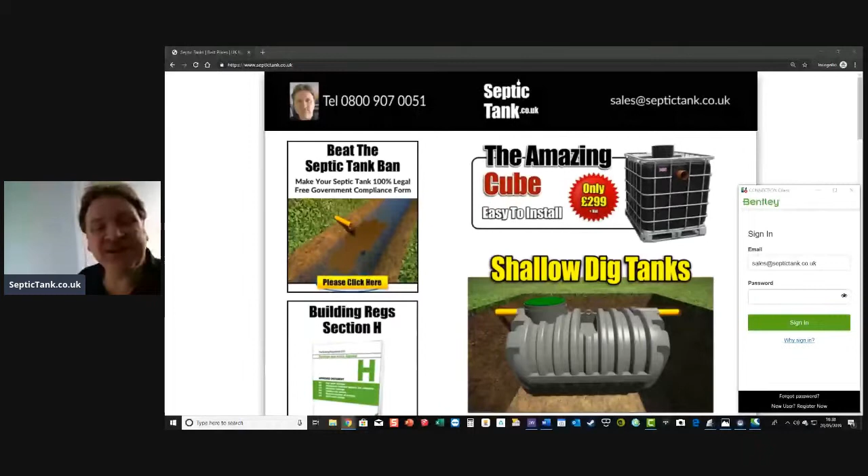Today I'm going to be discussing a very controversial subject called the septic tank ban. So, what is this septic tank ban? Well, let me show you.

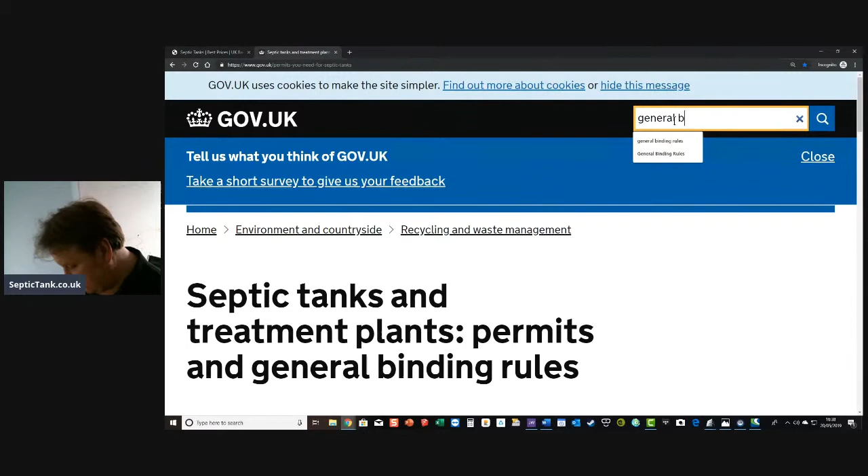If I go onto gov.uk, and you can do this yourself, the government's website for the whole of the UK, just type into the search bar 'general binding rules.' You'll get quite a few different headlines and subcategories. Click on the third one down because it gets straight to the point. Here we go: general binding rules. That's another term for the septic tank ban.

It says: rules you must follow if your septic tank or your small sewage discharge treatment plant releases or discharges liquid to surface water.

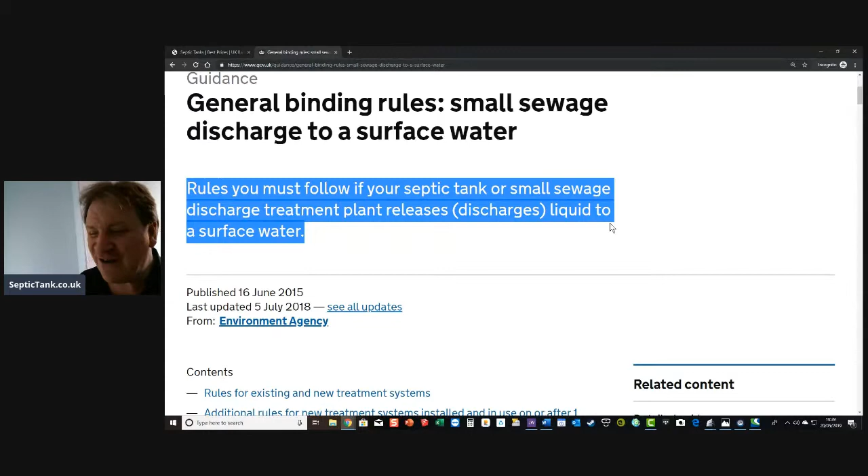So the septic tank ban, yes, it's making a lot of people cross, frustrated, angry, especially if they haven't already got enough on their plates with Brexit and stuff like that. But I just want to reassure you, this broadcast today is full of good news for you. If you've got a septic tank, don't stress, don't worry about the septic tank ban. Not all septic tanks are going to be banned, only certain ones, and I'm going to show you which ones in a minute.

As I said, it all has to do with the general binding rules. But before we go there, I just want to show you this. If you've got a septic tank, then one thing you must do, one thing you should do, if you want to save yourself thousands of pounds and make your septic tank compliant, is get yourself a free government compliance form.

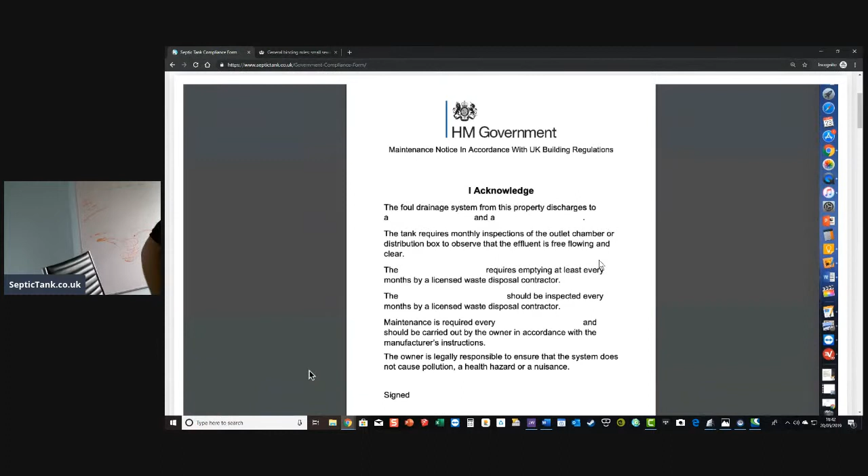I think I might have one in the flesh here. Hold on, all right, here you go. Here's one in the flesh there. That's what they look like, a government compliance form. And as I said, download as many as you want. That is one way that you can make your septic tank fully legal.

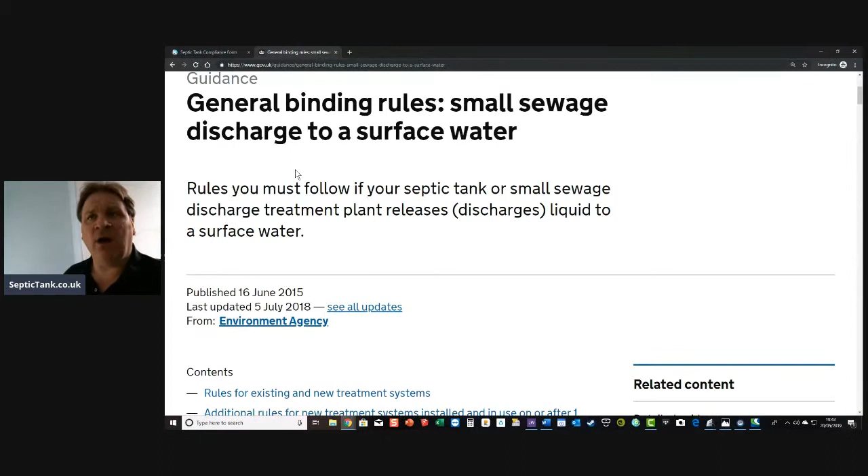So moving back on with this then, getting back onto it. If you've got a septic tank, I'll just rewind a bit: not all septic tanks are going to be banned, I've already said that. Only certain ones are. When I say banned, the government will send inspectors around, and if your septic tank is discharging to surface water, then they can ban you, stop you from using it.

They can decommission it. That's basically what this is all about. So let me give you an actual scenario now so you can see.

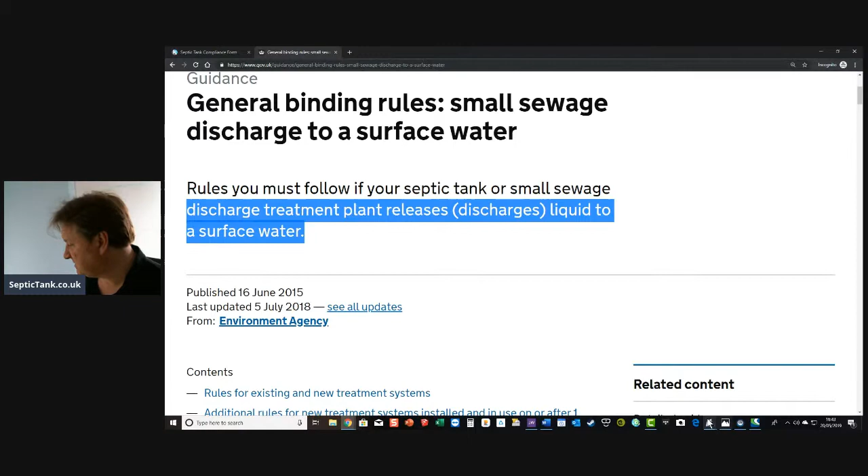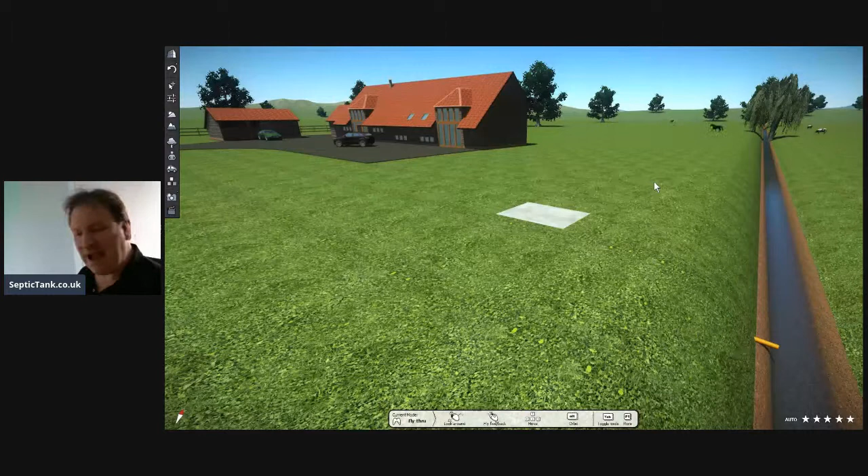All right, here we go. Let me just shut that down there. This one is what I want to show you. So let me give you an actual scenario of real situations people are finding themselves in if they've got a septic tank. So let's give you this one.

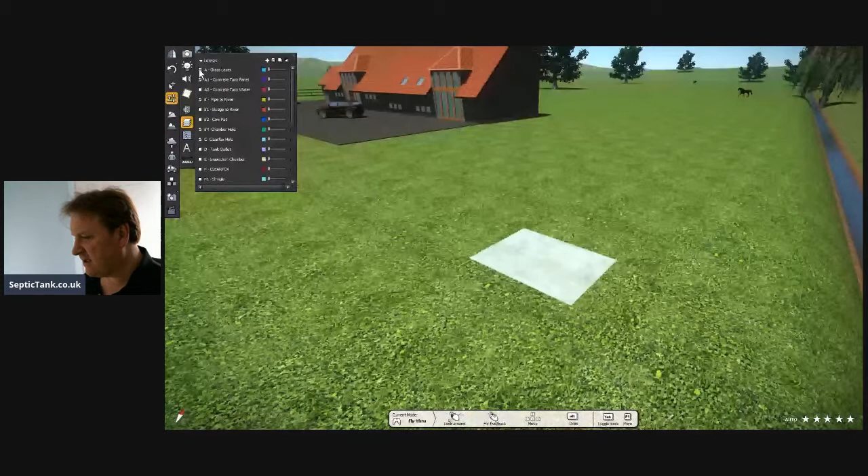So here we go. Here is a property, by a watercourse as you can see, and here is a septic tank. Let's have a look under the bonnet. Let's take away the grass layer, and there you go, that's revealed the septic tank. Now this septic tank could be new or old, it doesn't matter whether it's 5 days old, 5 years old, or 50 years old. It's what it's doing that it will be judged on.

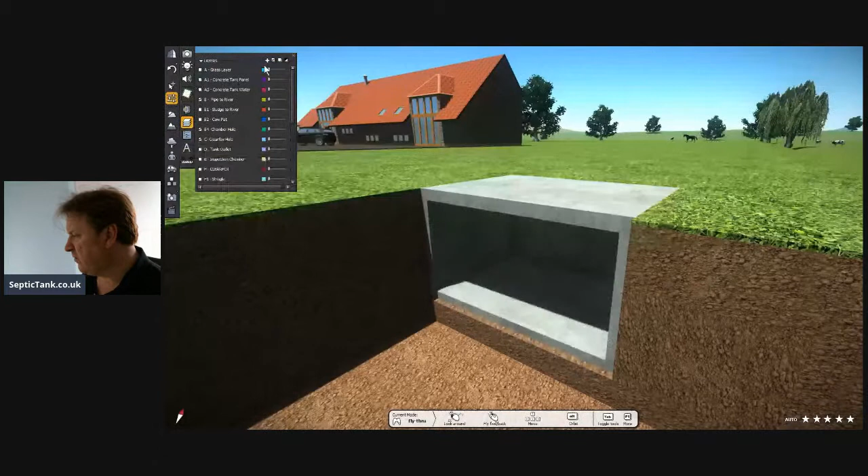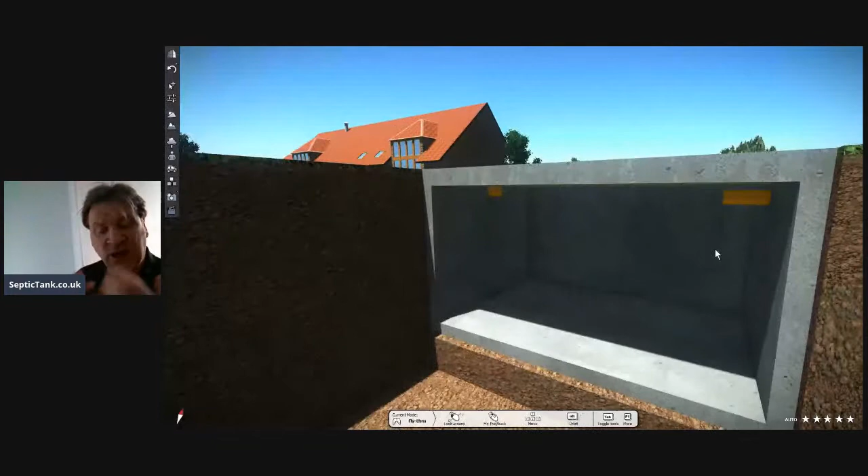So there's the property. All the wastewater from the property, let's take the tank side off here. All the wastewater makes its way into the septic tank. There's an inlet pipe, and there's an outlet pipe. All the wastewater leaves the property - I mean stuff that comes from your washing machine, your bidet, your dishwasher, your toilets, your baths, your shower, whatever. It ends up in the septic tank here.

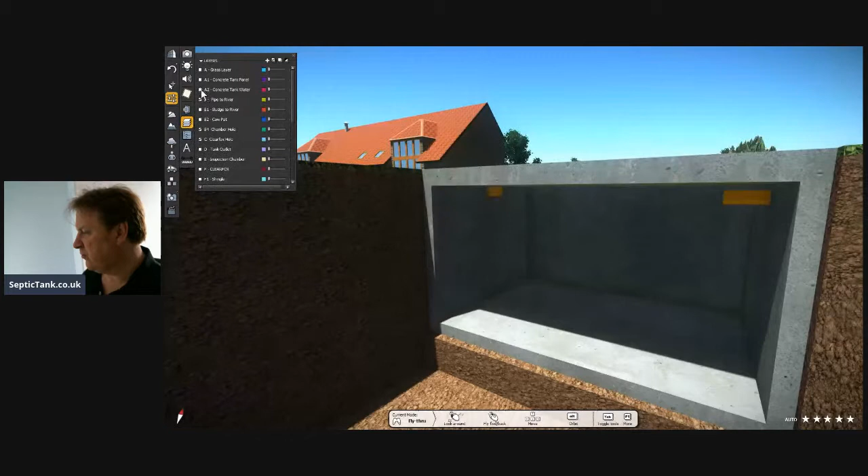Let me put the water in there, and that's what it looks like. It's pretty mucky, pretty horrible, but typically that is what the wastewater looks like that enters the tank.

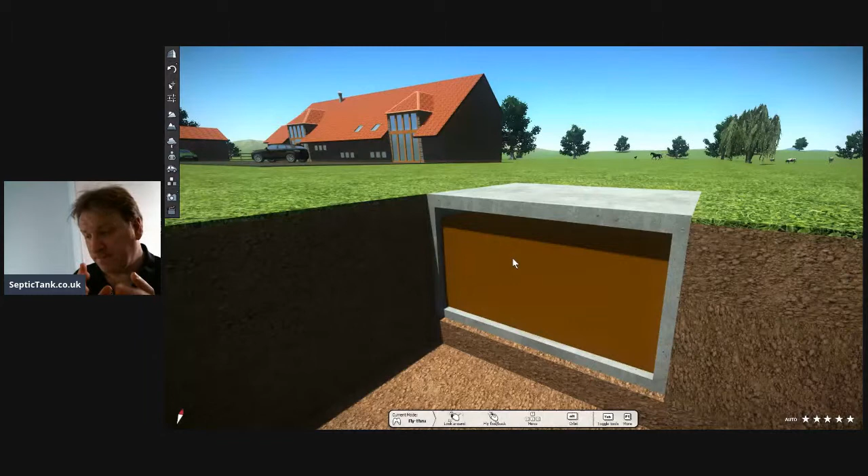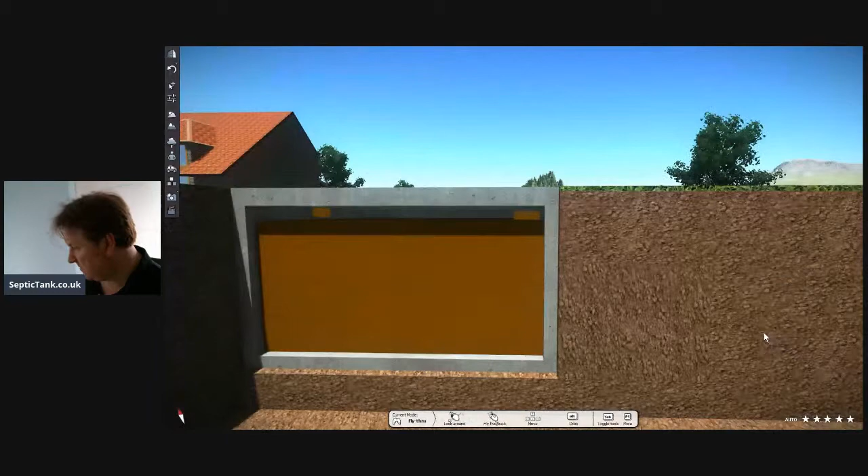So now this is the problem. From there, as I said, there's an outlet pipe, so the water makes its way down the outlet pipe. Oops, sorry if that made you a bit sick. Let's do that again, I'll try and go a bit slower. So there's the outlet pipe. Oh, get off, what's going on here? Oh yeah, sorry, it's the controls, I'm new to this thing.

Okay, so it makes its way down the outlet pipe, and there's the pipe there from the septic tank. What happens is the water makes its way out from that and into the watercourse, the river. So there you go.

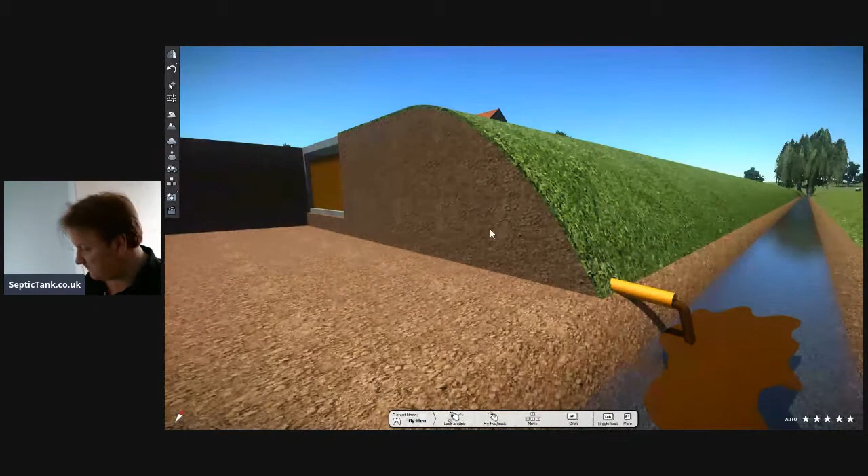So that is pretty much what happens, and that is what the government are basically trying to stop. They're trying to stop septic tanks polluting watercourses like the one I'm showing you. Now if your septic tank is doing this - going into a ditch, a stream, a culvert, a dry ditch which isn't actually dry once it's rained - it will become illegal from the 1st of January 2020.

So what are your options? If your septic tank is discharging into a watercourse like this, what are your options? I'm going to show you a couple of options now.

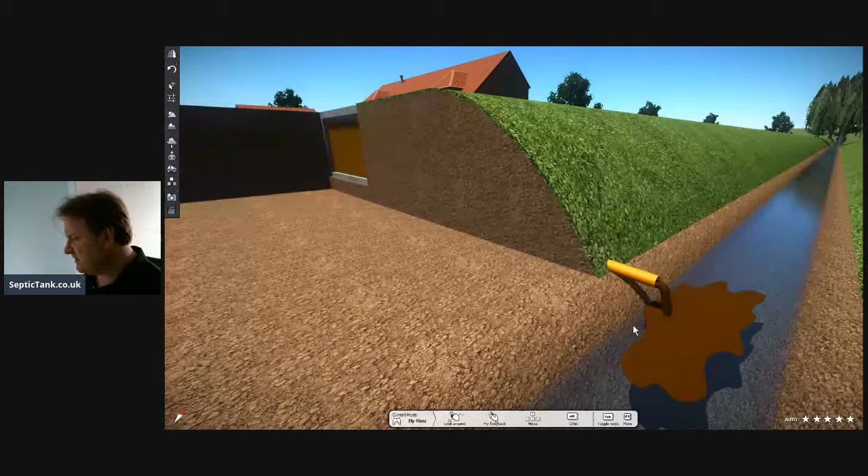All right, let's just come out here. So there we go, let me just put the tank panel back on. Bear with me a second. So there's the tank panel back on.

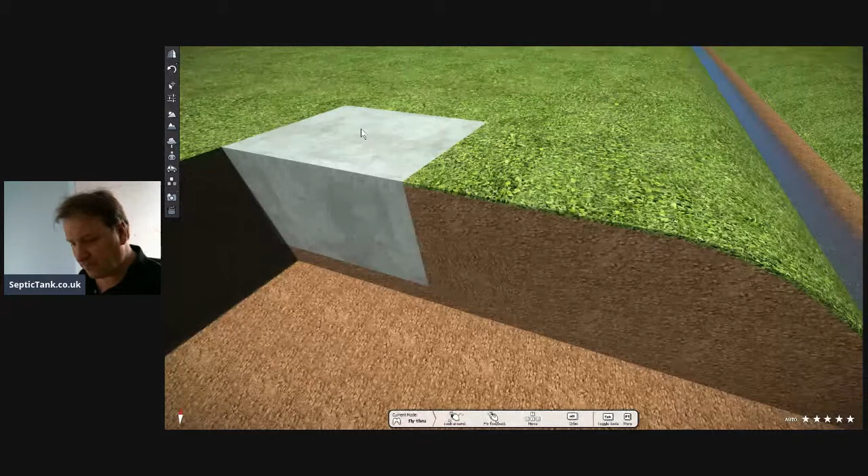Now one of the options is you'll get some companies around and they'll say you can't use your septic tank anymore, it's illegal, which you already know because I've just explained that to you. So many firms will come and say you need to put a sewage treatment plant in. So what is a sewage treatment plant? I'm going to show you right now. A sewage treatment plant is like a septic tank but it runs on electricity. Raw sewage goes into it, and then it treats the water so it can legally discharge into a watercourse.

So let me show you one of these now. Bear with me a second. All right, let's take that off, and let's take that off. Let me do that, and let me do that. Okay, let me put this back now.

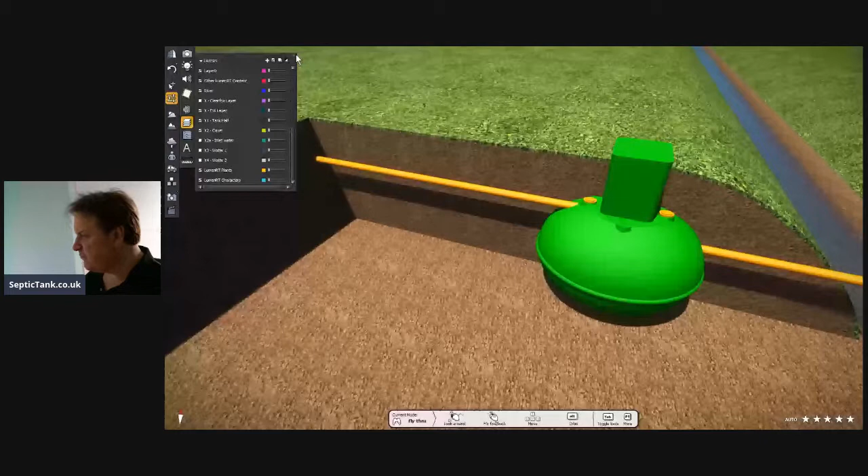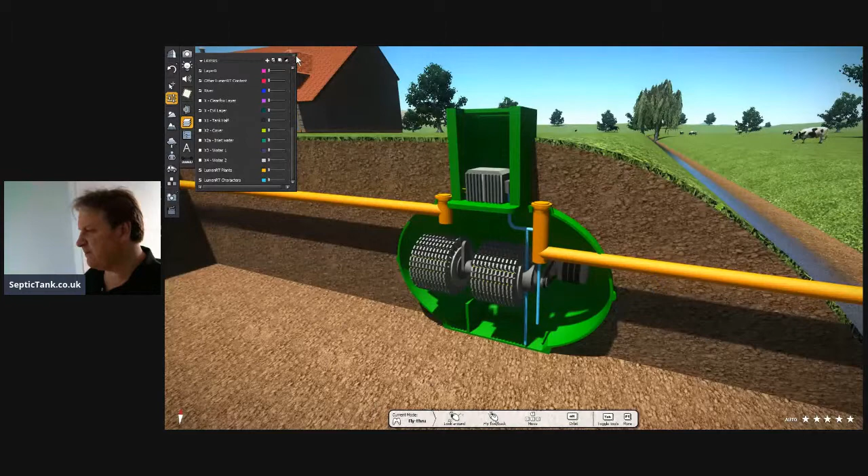All right, so here, we're still at the same property. There we go, so this is what they mean by a sewage treatment plant. Let's take a closer look at the sewage treatment plant here. Let me take the cover off, let me take that. Okay, so here we go. Here's a typical electric sewage treatment plant.

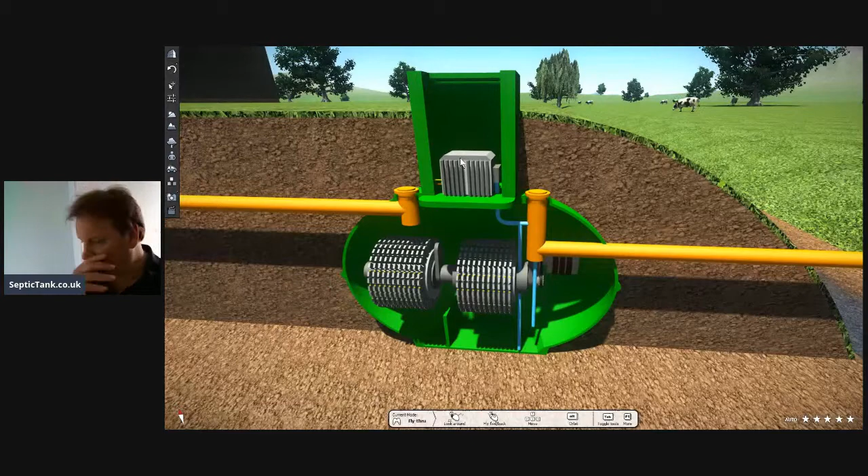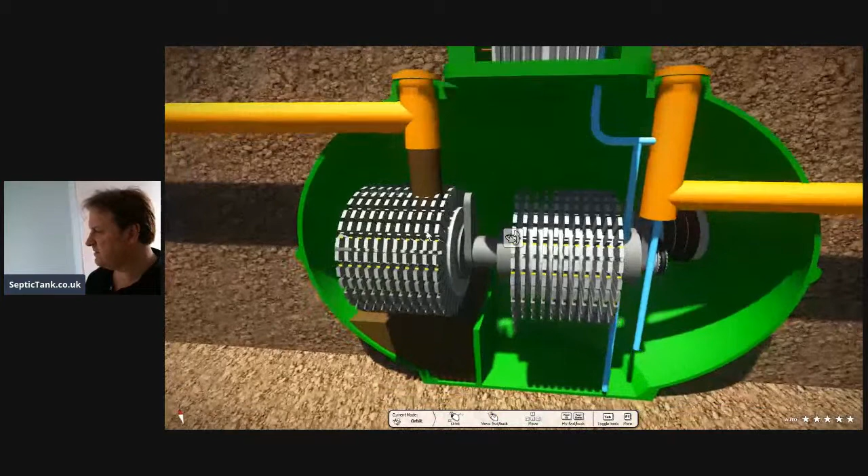Now, as you can see, here we've got compressors and a motor. So what happens is all the sewage waste from your property, because they've got rid of your septic tank now, all the wastewater will come into the treatment plant and go into the compartment here. Let me show you this. All the waste goes in and ends up in a little compartment there. Now these shafts, bearings and motors turn around, and the compressors and motors oxygenate the water so the bacteria can get to all the horrible, yucky stuff.

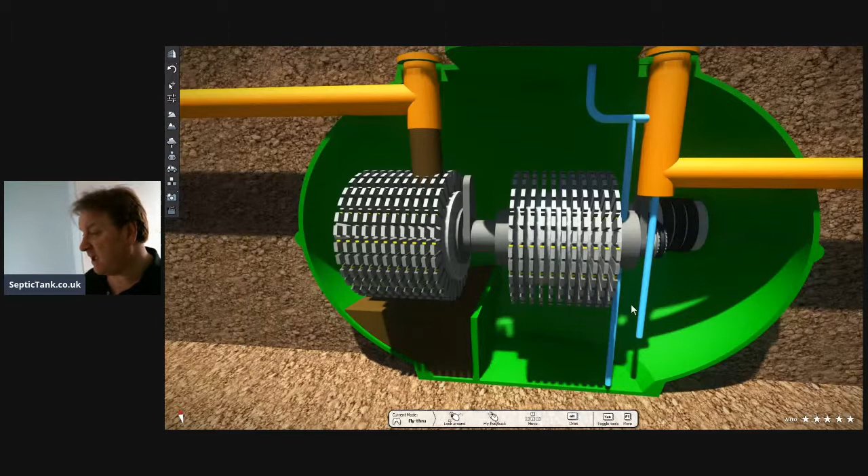And then what happens is it makes its way from this compartment into this compartment here, and it turns the water into cleaner water - into a cleaner discharge. And then that water is sucked up these pipes here, and then it can discharge.

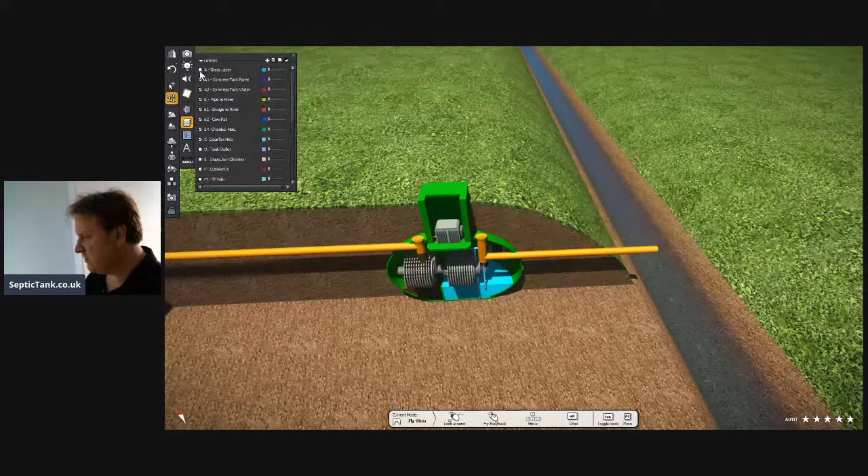So let me put the grass back on for you. Hopefully this will work - oh no, I haven't fully put the grass back on. But the point is, it will make its way down this pipe and out into the water course. Now, that is one option that you've got. Remember, I told you you've got a few options, okay?

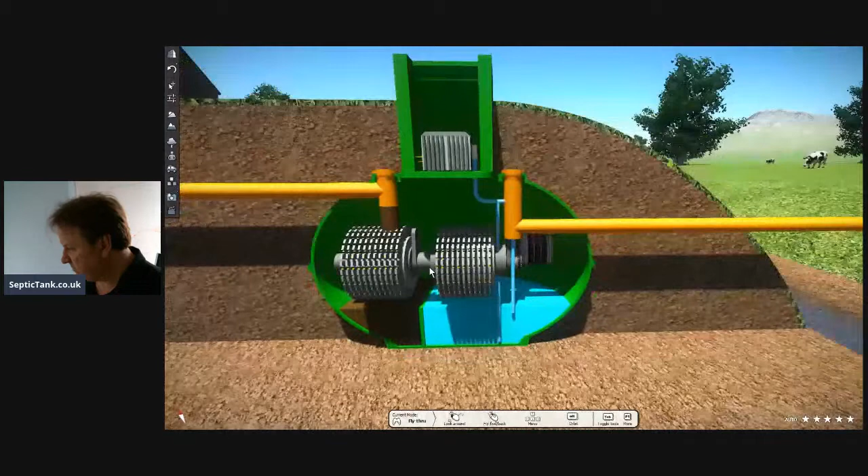Now, the pros and cons of an electric sewage treatment plant. The pros are they will allow your sewage to be treated and go directly into a stream, river, etc. However, as you know, compressors, motors, bearings, cogs, shafts and all that kind of stuff don't bode well around water.

So an electric sewage treatment plant typically comes with about a year's warranty. That's all - a year's warranty. You can pay anywhere up to, flaming hell, anywhere from 3,000 to 25,000-30,000 quid for an electric sewage treatment plant, depending on the number of bedrooms you've got.

Then you've got to pay at least 1,500 quid a year to run it. Don't be fooled by people that say, oh, they only cost a little bit to run. They do, but relatively over the course of the year, they cost 1,500 quid to run.

Then on top of that, you've got to get them serviced by an approved contractor. If you don't get them serviced by an approved contractor, then the warranty on it is null and void. So it's going to cost you, even a small one, a budget of about 1,500-1,700 quid a year, which is a hell of a lot of money. It's getting on for like 10 grand to run these things over 5 years.

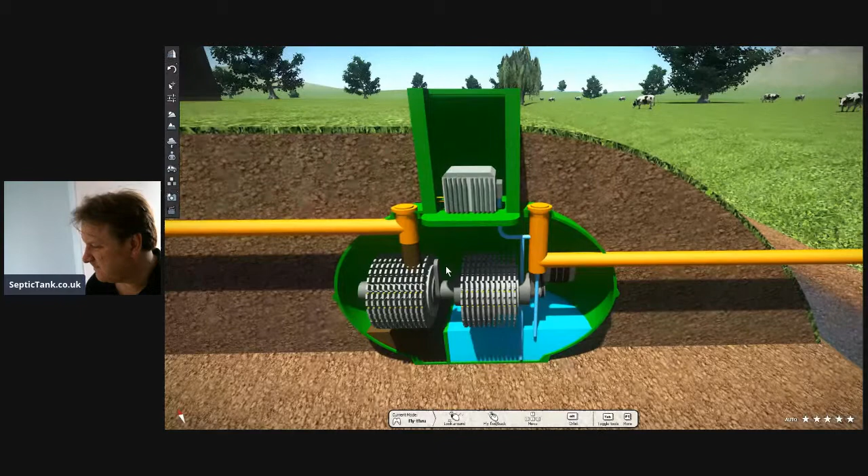All right, so that is option one to the solution of having a septic tank.

Okay, so let me just put the cover on that. Oh man, where's the cover gone? Where's the cover gone? Cover's gone. Where's the cover gone? All right, there we go.

All right, so there you go. That's a typical looking electric sewage treatment plant.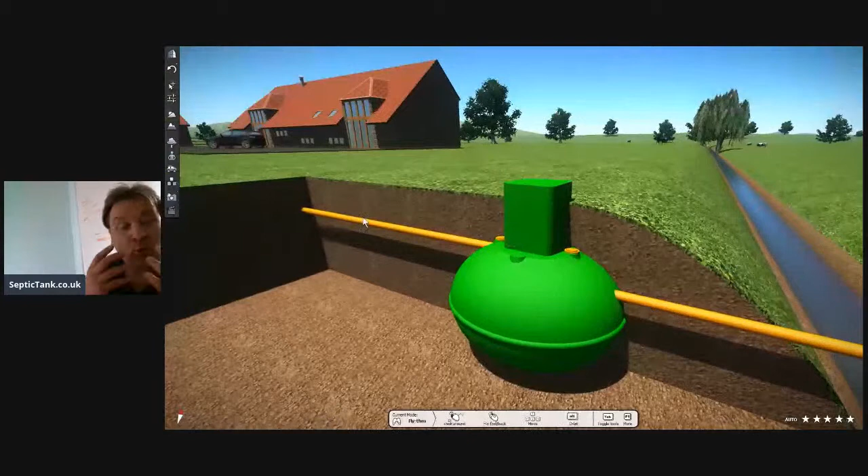So what's your other option? Well, I'm going to show you something that will blow you away. Right, have a look at this. So let me do this.

Okay, so now we've gone back to our septic tank. Remember the septic tank, that's what it's doing. And you've been given your quotes of 15, 20, 30,000 quid to put an electric sewage treatment plant in - that's going to cost you 15, 20, 30 grand. It's going to cost you anywhere from 6 to 25,000 quid to put in, and then it's going to cost you 10 grand every 5 years to keep the thing running.

Let me show you an amazing thing. It's called a septic tank converter. Have a look at this, right? This is an amazing solution. Approved by the UK government and certified by the UK government, building regs and the Environment Agency. Have a look at this.

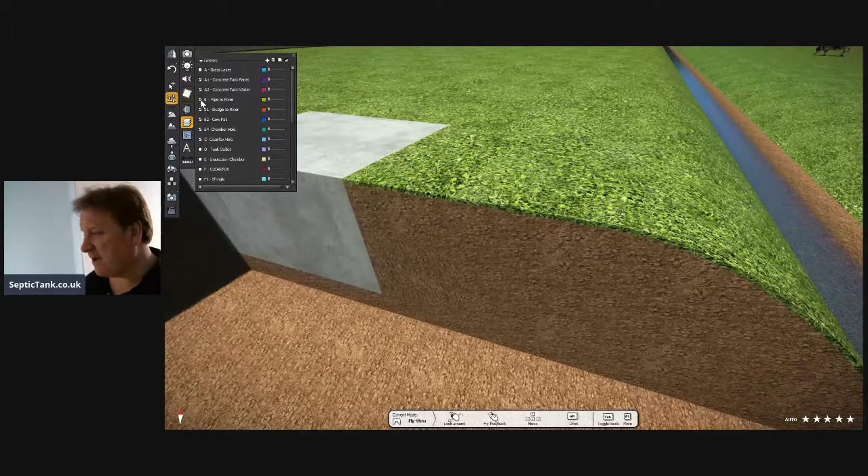You've got your septic tank, right? What I'm about to show you is made for the DIY market. Have a look at this, right? So you dig one hole and you dig 2 holes. So there you go, there's your holes. So that's your septic tank and all the gunk is going into there.

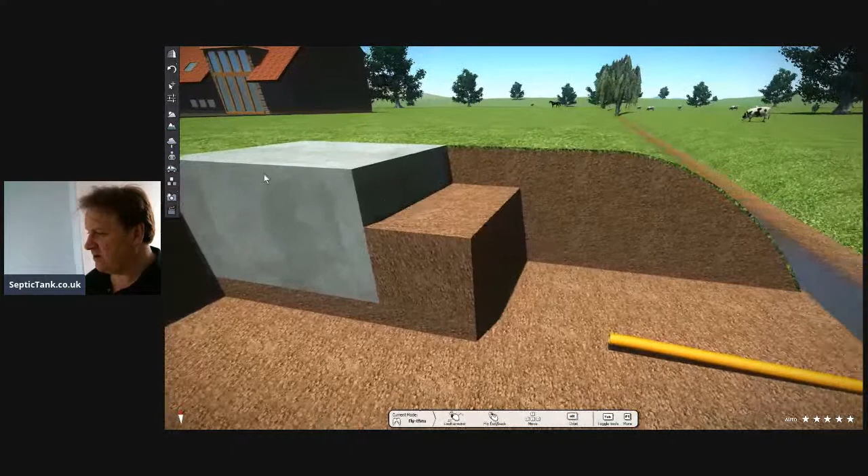We've shown you that. Then you dig 2 small holes, right? You just get a small digger to do it, get your builder to do it, get whoever to do it. Then what you do, you put an inspection chamber there. Okay, that's pretty straightforward. Let's zoom in and show you - it's a standard manhole chamber, septic tank chamber. Okay, so that's pretty simple so far, isn't it?

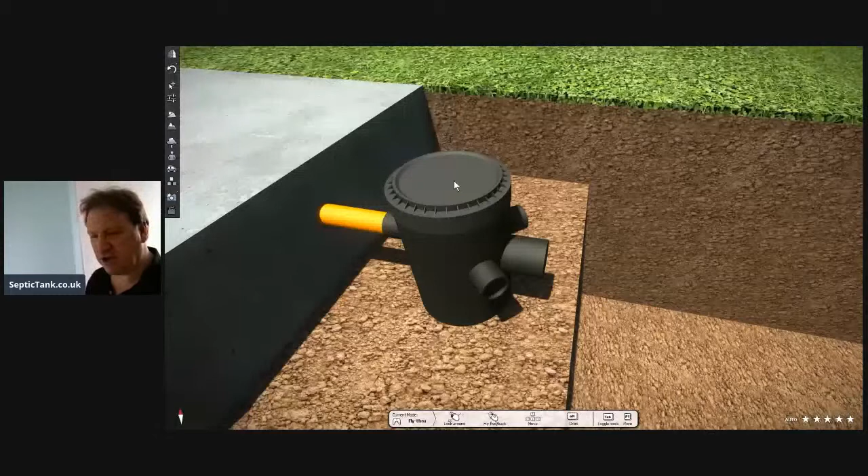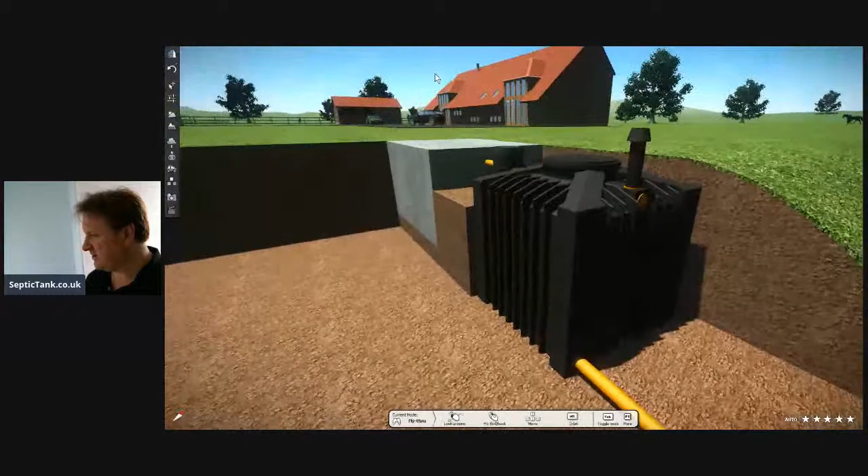Right, then have a look at this. Right, let me get this. It's called an ecosystem. Look at that. Right, okay, so there it is. Let's see if we can change the sun around a bit.

Give you a better angle at it. Let's just make it maybe a bit darker. There we go. Have a look at that, baby. Look at that. Is that beautiful or what?

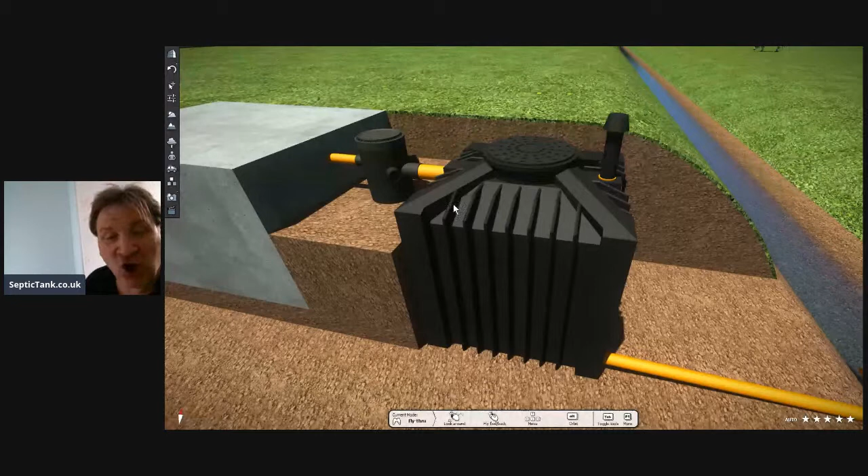But not only is it beautiful, you're not buying it obviously for its looks. Let me show you what happens. It's a non-electric septic tank converter, right? So let me show you what it does.

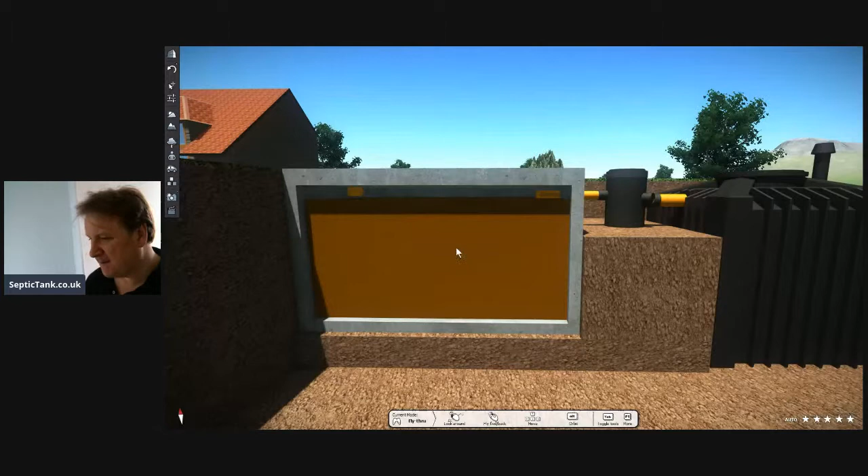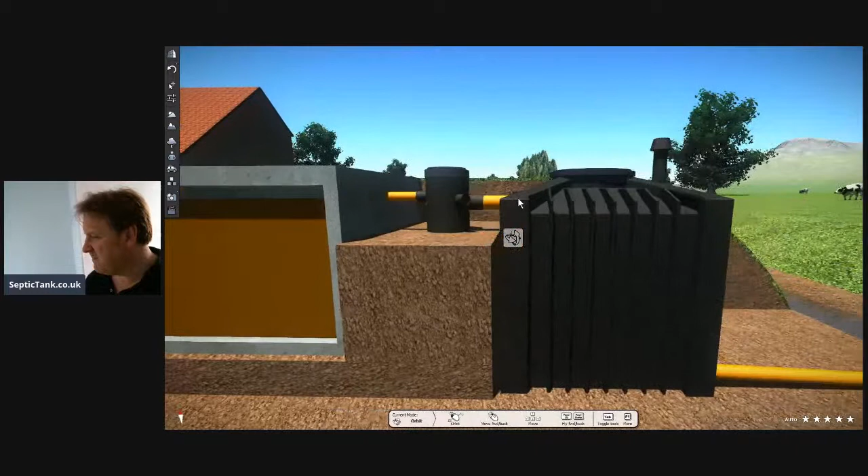All right, so let's go back to our septic tank. Let me take the panel off. So there you go, you've got all your horrible, yucky, disgusting stuff going into your septic tank. It then makes its way from the septic tank through the manhole chamber, then through this non-electric organic ecosystem called a septic tank converter, right? And then it goes from there down the pipe. And so now, instead of this horrible, disgusting liquid that comes out, you get pure, clean water.

Look at that. How amazing is that? And that is what the septic tank converter does. It converts horrible, filthy, disgusting sewage effluent into a clean, legal discharge that can legally discharge into any watercourse, such as a ditch, a stream, whatever.

And they're really easy to put in. Just get your builder to put one in. Just get your local builder or whoever to put it in. Takes them a couple of hours to do so.

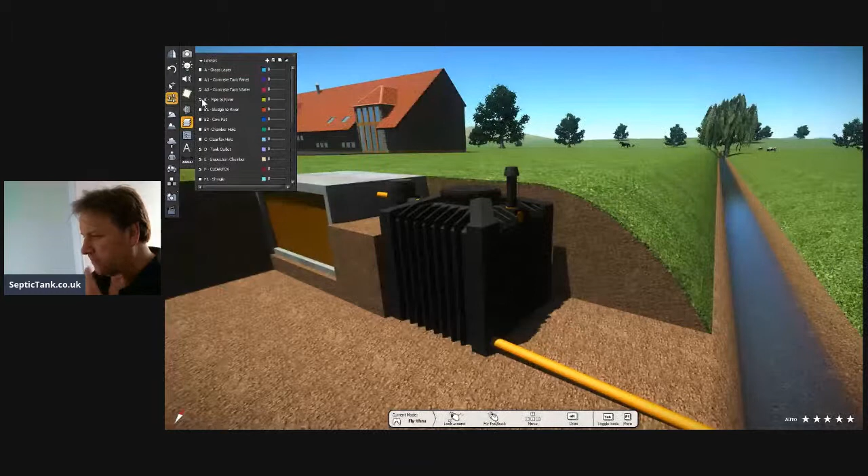And so let me just put the tank panel back on. There we go, and let me put some grass back over it. Okay, and that's what it will look like when you've put the turf over it or seeded it. And then you've got the grass layer over it. And there you go, that is what it looks like. It just blends beautifully into the countryside.

All right, so now I've shown you an amazing tip. This septic tank converter will save you thousands and thousands. So instead of having to spend £15,000, 20,000, 30,000, and spend 2,000 quid a year in running costs, these non-electric systems are just 2,999.

Have a look at this, right? Let me show you this. This will blow your mind. Let me show you this, right? All right, so let's just go back on here.

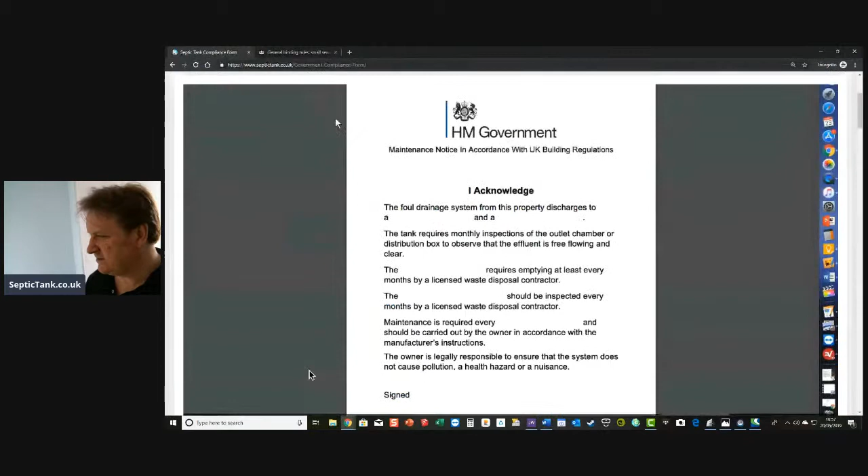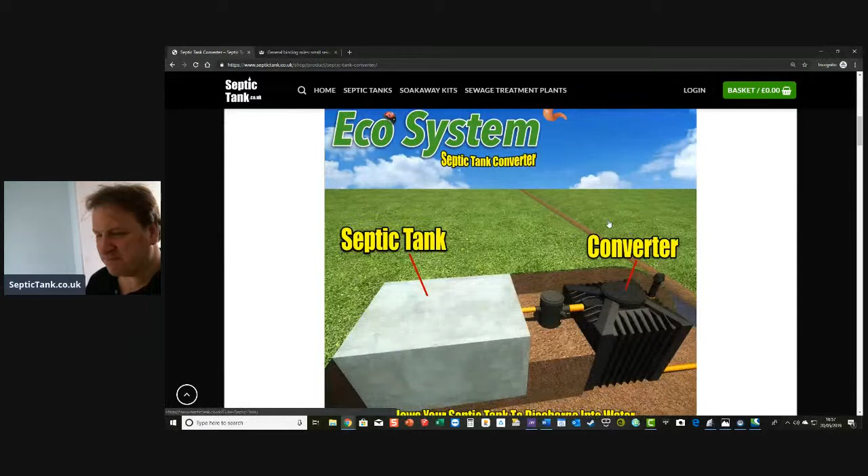So just go to septictank.co.uk and click on sewage plants. And there we go, you've got the septic tank converter here. And there it is, picture of it. But it's here, there you go. The Eco System septic tank converter. Have a look at that. How cool is that, man? That is amazing.

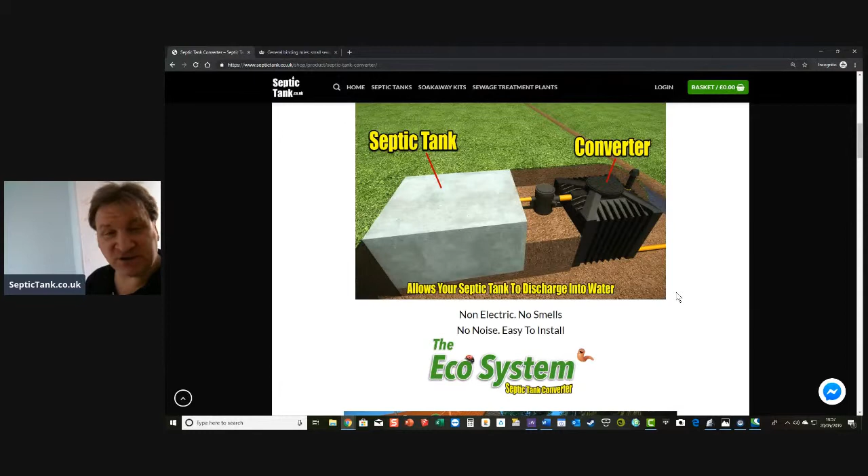So it's non-electric. There's no smells, there's no noise, and it's really, really easy to install. And there's another video there explaining a bit more about it. And there you go, that's the price of it. And so it's made for the DIY market. So there you go, that's before and that's after.

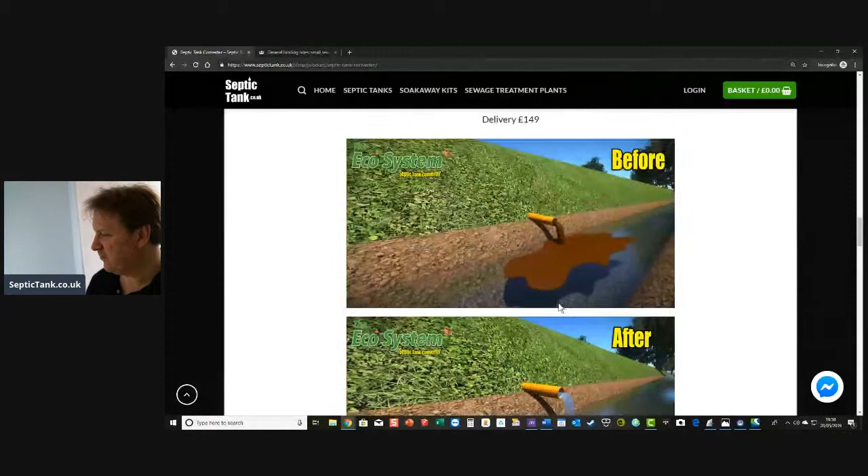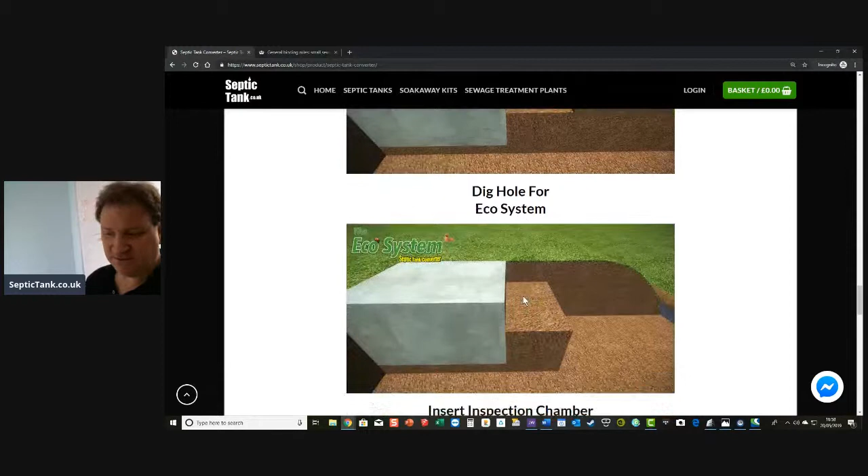Before and after, so there you go. So that is what, so there you go. So you've got your septic tank there. Just dig a hole, and dig another hole. Put your inspection chamber in. Put the Eco System in, put your pipe in, and job done.

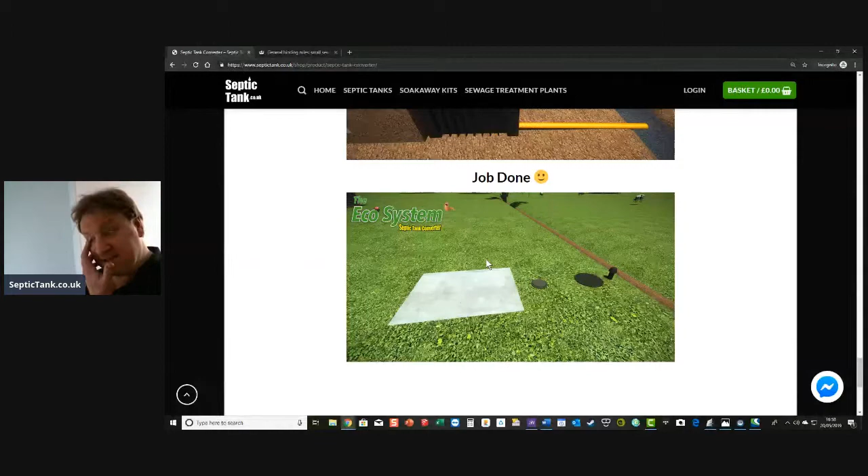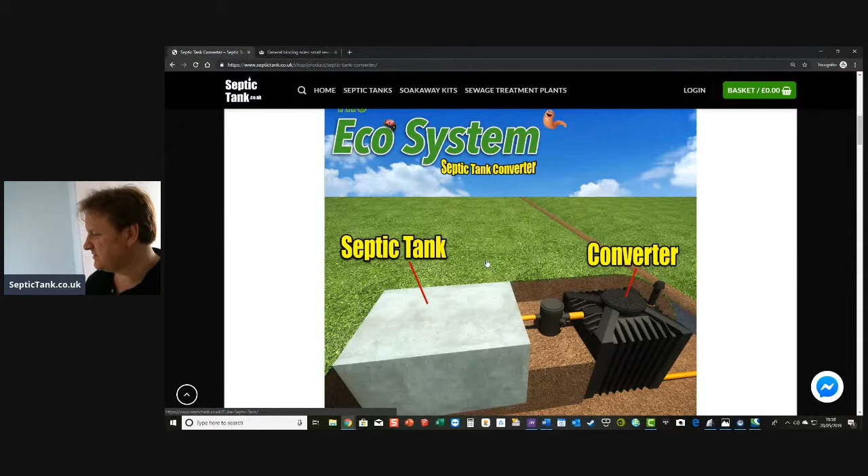And so that, for me, when I discovered you could get a septic tank conversion system, it just has changed the lives for so many people that have been quoted ridiculous amounts of money to put in sewage systems and stuff like that. Well, you don't need it. You just need a septic tank converter.